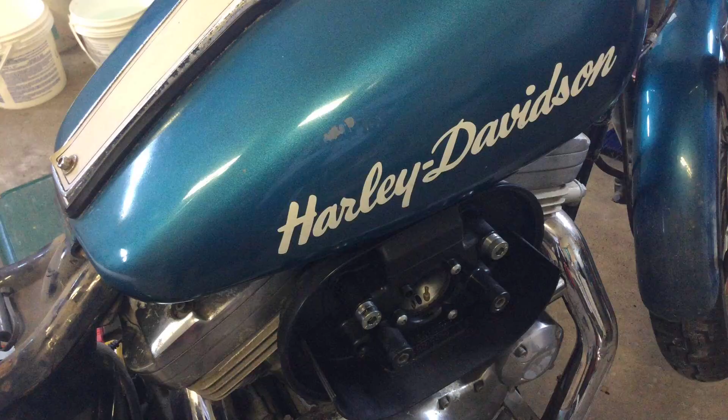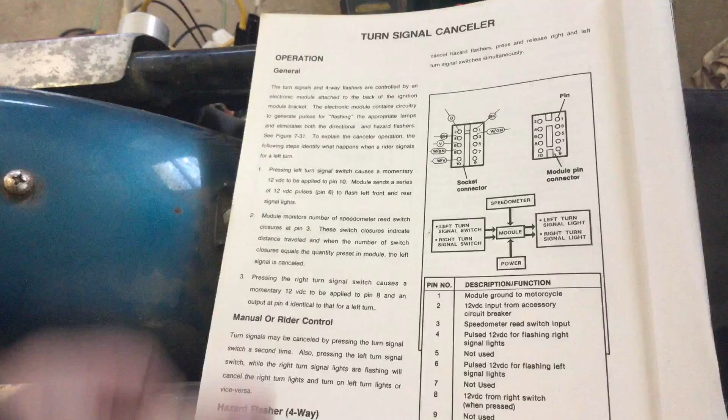This is a 1991 Harley Davidson Sportster, and it's got a problem with the signal lights. The right side signal light doesn't seem to work at all. So after figuring out that it's not the switch, the bulbs, the ground, or anything like that, I used the Harley Davidson manual to figure out the wiring diagram and the location of the turn signal canceller, or control module, however you want to call it.

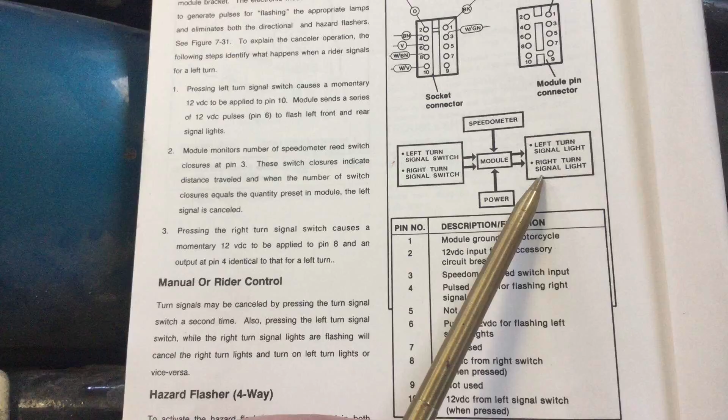Okay, there's a nice diagram. The way this system works is when you press the turn signal button, 12 volts comes down to the control module. I'm talking about the right side. So the right side turn signal switch turns on 12 volts, comes down to the module, and then the module sends out 12 volt pulses to the turn signal lights, which, by the way, both bulbs have to be good for this to work. So this is where your voltage comes from, here to here.

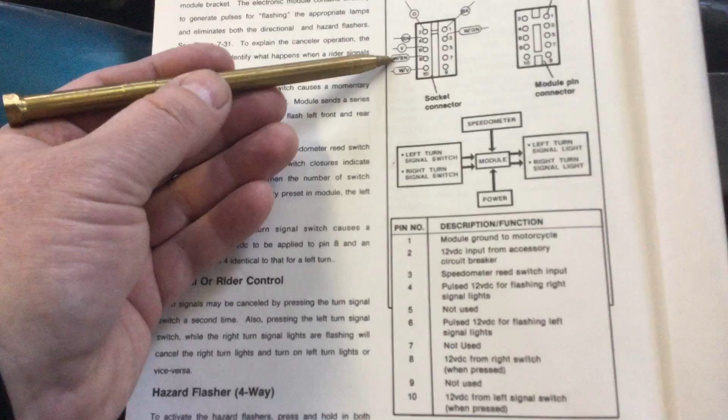So for the right side, 12 volts from the right switch when pressed, number 8. So you look up here at pin number 8, and it says that it's a white-brown wire. So if I take the white-brown wire and I connect it straight onto the wire that goes to the right signal lights, which is right here, because pulse 12 volts for flashing right signal lights.

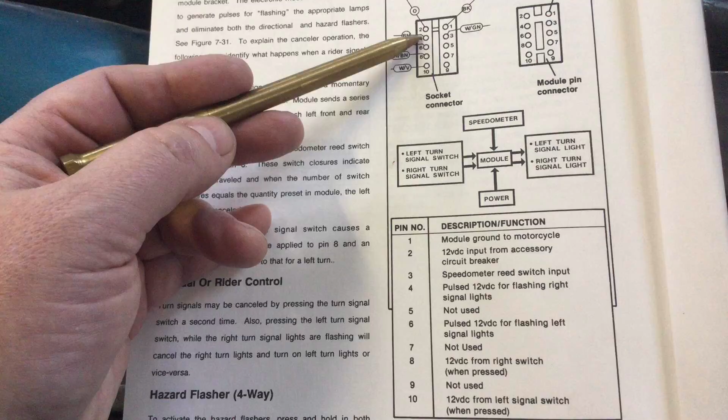So number 4, right here, number 4, it says brown. That's what BN means, brown wire. So if I connect number 8, white brown, to the brown, then what happens is the right side turn signal lights turn on. So instead of buying a new module for, I don't know, 150 or 200 or 300 or whatever it costs...

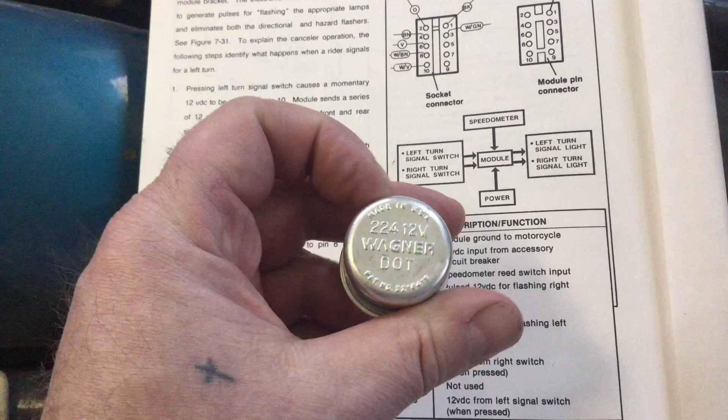I'm simply going to wire this 12 volt turn signal relay, 2 wires on it, between those 2 wires. So it's going to go from number 8, white brown, onto there, and brown onto there. With this, it doesn't matter which way it goes, because inside there's a little element that heats up when 12 volts is applied to it, and then the contact opens. Then it quickly cools down and closes and heats up and opens, and that's how it goes. Click, click, click, click, click, click.

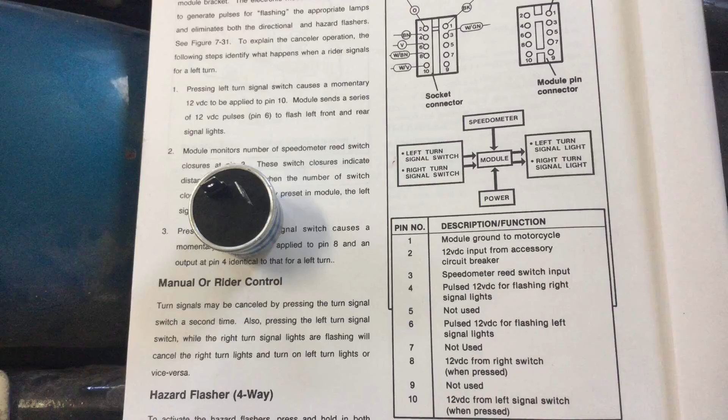So I'm just going to wire that in there on that side instead of using the module, because the module still works for the other side.

This is the left side of the motorcycle. This is where the battery goes. I already took it out. And this is the ignition control module, which I unscrewed, but you may not really have to do that. This is the back of the hole where the screw goes in that holds the control module in, which I already took out. This is the control module right here for the signal lights.

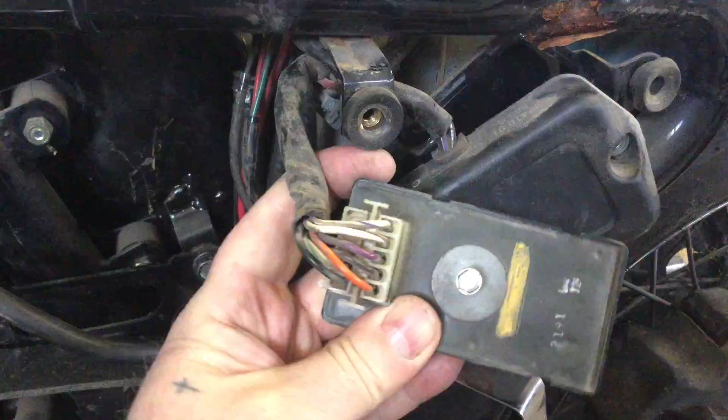Okay, and there's the connector. It's got the brown white, the brown, a little dusty, might need some cleaning, but you'll be able to see that on your own motorcycle. And this simply disconnects like this. Press those 2 tabs together and pull out.

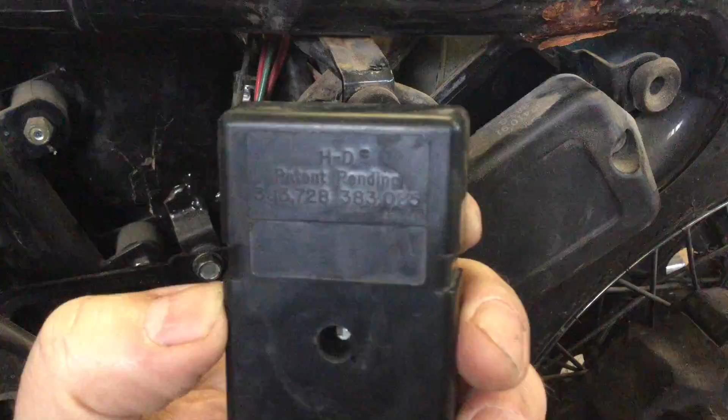Okay, so this is what's called a non-serviceable part. So you'd have to go to Harley Davidson and buy a new one. Or if you can find a used or aftermarket one, hopefully it works. You just plug it right in there. But you can do some simple wiring diagnosis to determine whether the problem is this or not.

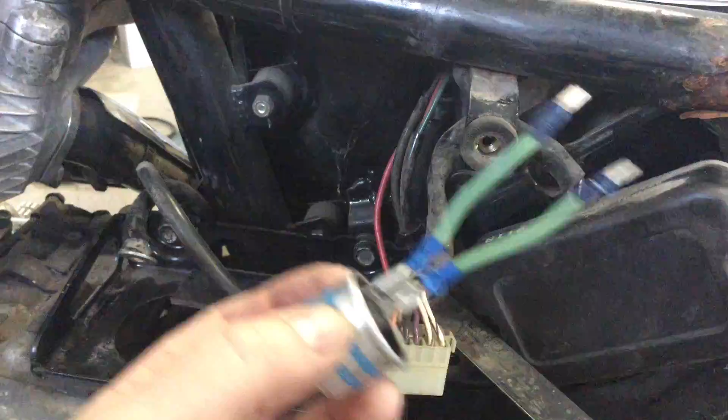Okay, so I'm still going to use this, but I'm also going to jump the right side with that signal flasher so that I don't have to buy a new one of these. Okay, so I have my custom signal module hack, I guess, hooked up here. And what I'm going to do is hook that up to the brown and the white brown, and that's going to bypass the signal module for the right side.

If they don't fit tight enough, what I can do is actually go onto these connectors here and spread them out a little bit with a tiny screwdriver. And then they will fit tight right in beside here, so I don't have to make any modifications to the wiring harness.

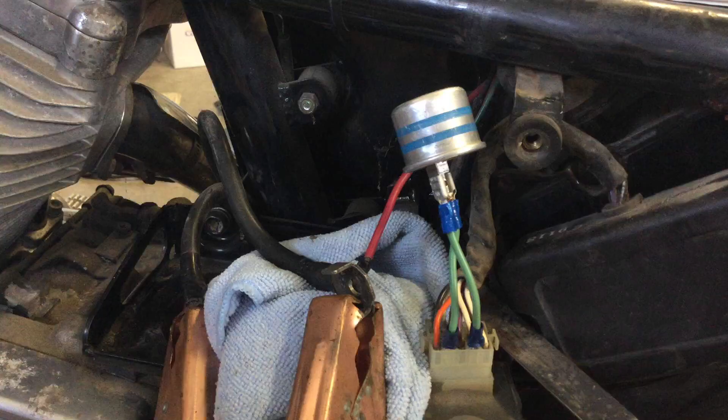There we are, it's hooked in. Okay, I got some booster cables hooked up to the power supply to a battery that's sitting on the floor right now. And I'm going to turn the ignition on so you can hear the signal light flashing. And that's good enough to pass the safety.

Now there's no reason why you couldn't hook two relays in there, one for the left, one for the right, and then if you needed to have your hazards on, you could turn on both sides at the same time. Really, I don't know anybody who uses hazards on their motorcycle.

There's an easy hack that you can use to fix your Harley signal lights without buying a new module. Thanks for watching.